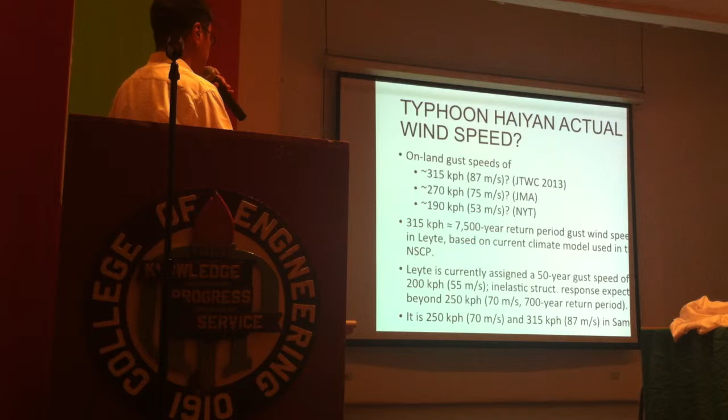Meanwhile, in Samar, the 50-year design gust speed is 250 kilometers per hour, and the 700-year return period gust speed, where damage will start to occur, is 315 kilometers per hour, so close to that number. So one of the things we did was look for simple structures where, based on an estimate of their strength, we can back calculate the wind speed experienced at the site.

So at Lawa-an, Samar, we saw this light post. So tubular steel, around 2-3 meters high. It was bent. Actually, we're not sure if it was because of flying debris or because of the wind. Here you can see it is bent towards the right, and meanwhile the sea is somewhere there, so it's suggesting winds coming from inland. So actually northerly winds must have affected it.

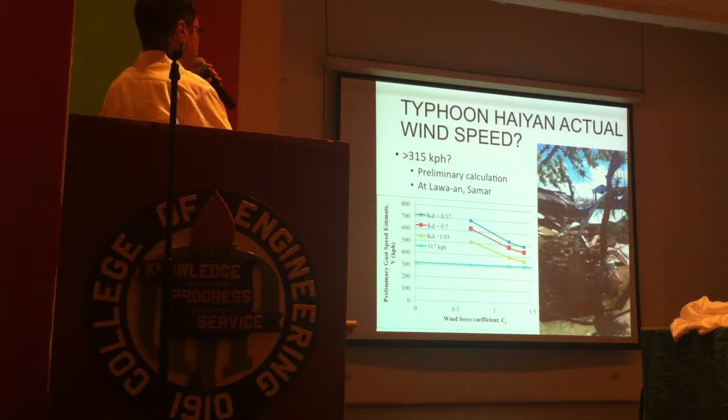Just based on what we know, for a cylindrical shape, the wind force coefficient might be as high as maybe 1.4. And then it depends on the surrounding terrain. You can assume suburban terrain, which is the case here. But to get somewhere close to 315 kilometers per hour, we have to assume open terrain, which is actually not the case, although for a relatively small structure with damage adjacent to it, a collapsed house, it's an acceptable assumption. But these are all assumptions.

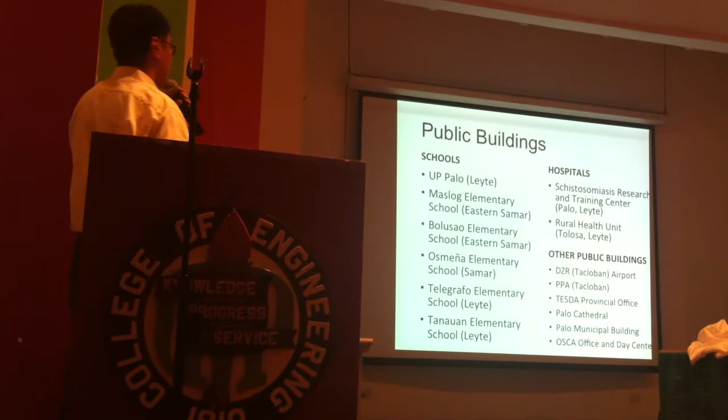But based on our estimated strength of this pole, we can only say the actual wind speed, at least at this location in Samar, might be higher than 315 kilometers per hour gust speed on land. And so to show you some examples of damages, we looked at public buildings, schools.

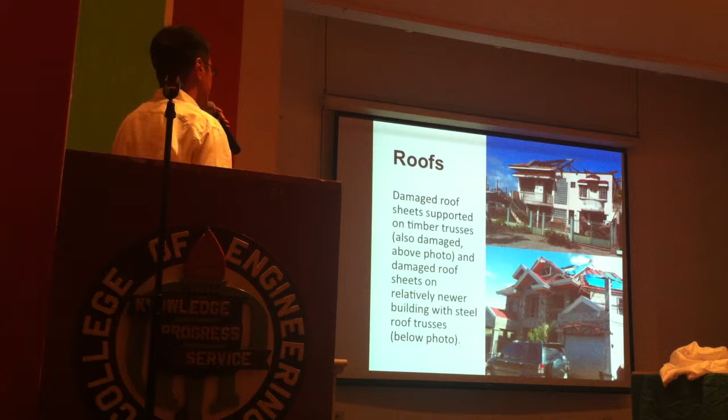Of course, we have plenty of roof damage. Here again, you have a relatively old building with timber trusses. So aside from the roof sheets, the timber trusses themselves are damaged. Here, the steel roof framing is still pretty much intact. The roof sheets are the only ones damaged in the newer building.

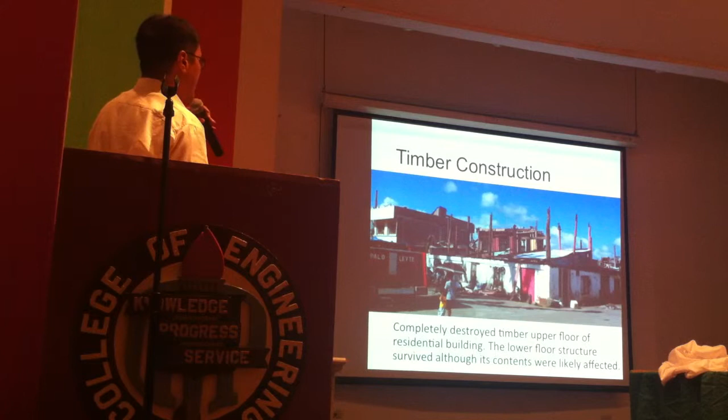And again, just to point out, this is actually Palo, Leyte. The water did not reach this area. It's clearly wind effects that damaged this building. It damaged the second floor. The second floor collapsed on the first floor, so you have, of course, property damage there. Now they just put some temporary roofing on the first floor, so they're still able to live there again.

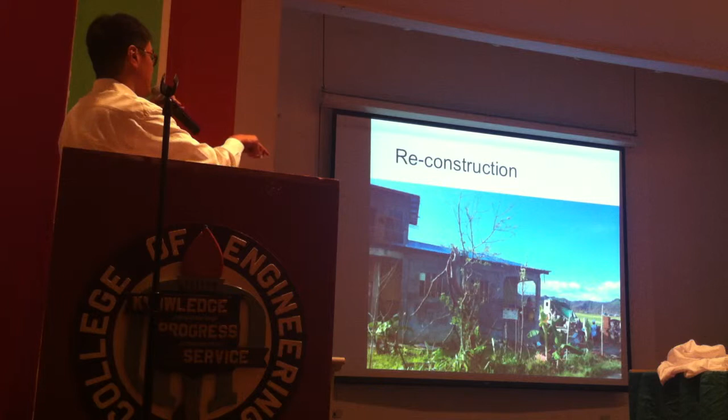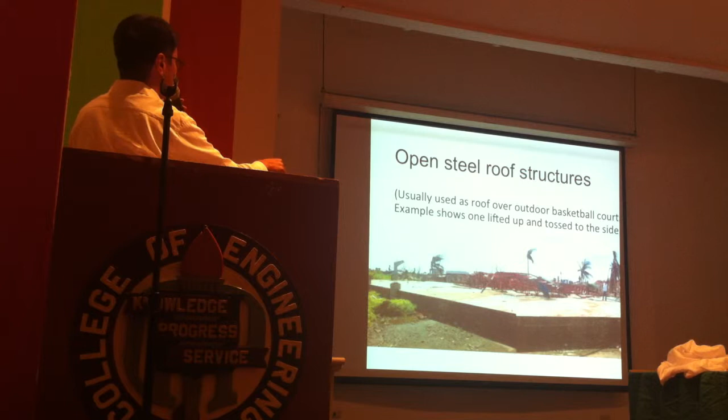And then you can also imagine open steel roof structures. For example, this used to be a basketball court. There used to be a basketball backboard and ring there. That got blown away. But actually, this steel lattice roof structure used to span on top of this open court. But it got lifted up and tossed to the side, basically because the damage occurred at the connection at the base. So in this case, you can see the connection detailing.

Yeah, you have welded angle bars to the main truss, the vertical truss and the base plate and so on. So, well, at least again for, let's say, these very strong winds, it appears insufficient.

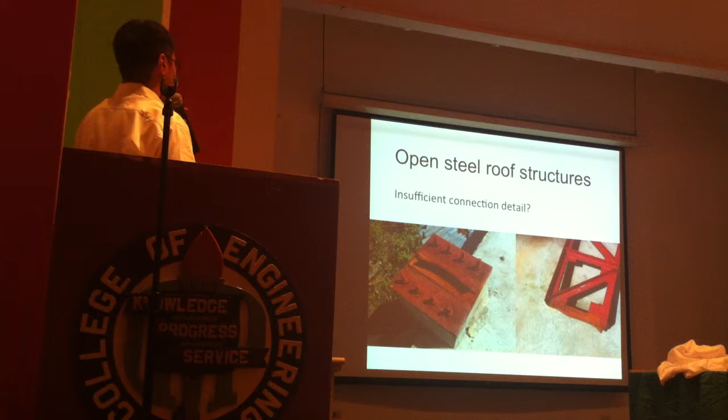And in many cases, this is the connection detail they use. You have, let's say, a concrete structure, a concrete column or pier, and then they just extend the rebar from the concrete column to hook the roof trusses. In this case, this main truss didn't fail, but you can see there used to be a truss line here, which was lifted off from the support.

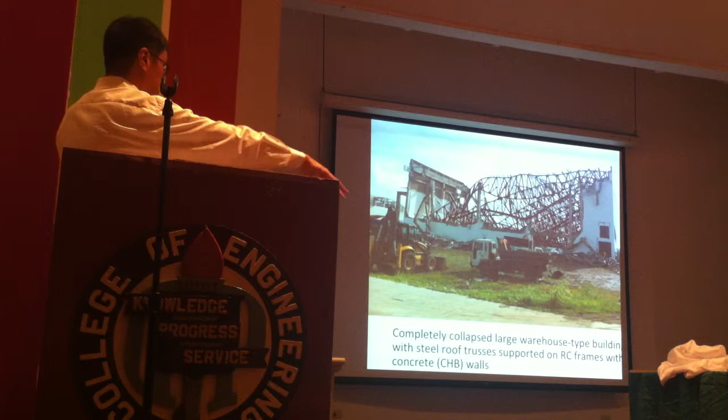And then again, wall-roof systems. So this is one example, an auditorium structure, basically a large open space. This is another example, large open space. You have steel roof frames, and then concrete supporting structures, columns and walls.

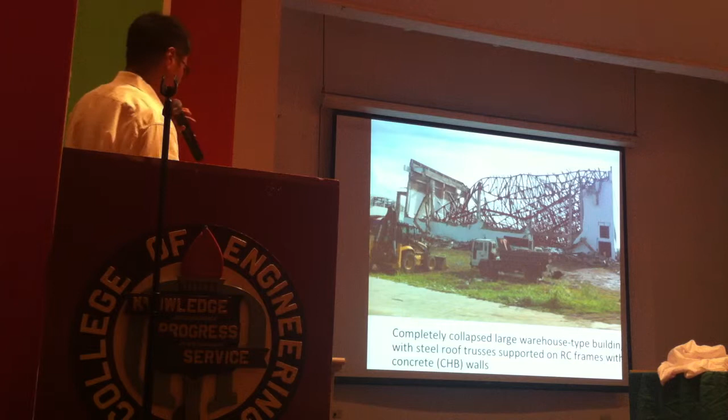So actually this is relatively new construction, maybe not more than 5 years old, but you can see extensive damage to this structure. Obviously the truss might have been lifted off its support, but at the same time, the walls themselves carried a little bit of the forces and the loads, and of course they're not usually designed to do that. Another close-up view of the very large walls. This is around 15 meters to 20 meters tall.

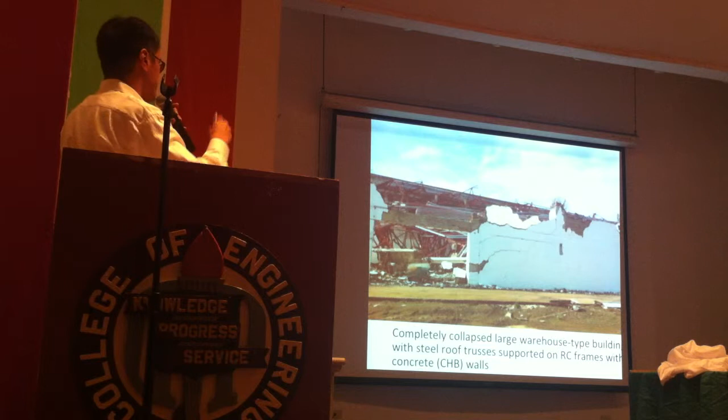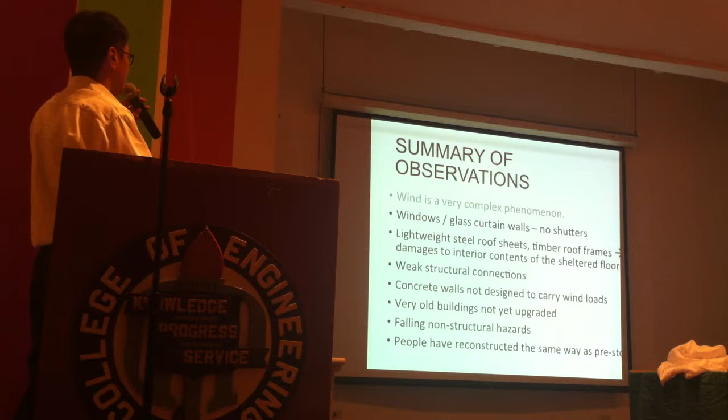So just to summarize, again, wind is a very complex phenomenon. We know that already, but windows or glass curtain walls are not usually protected or designed. There are no shutters, no boarding up. We don't usually do that. Lightweight steel roof sheets are damaged, usually timber roof frames as well. If you have a damaged roof, you will have damaged interior contents of the sheltered floor.

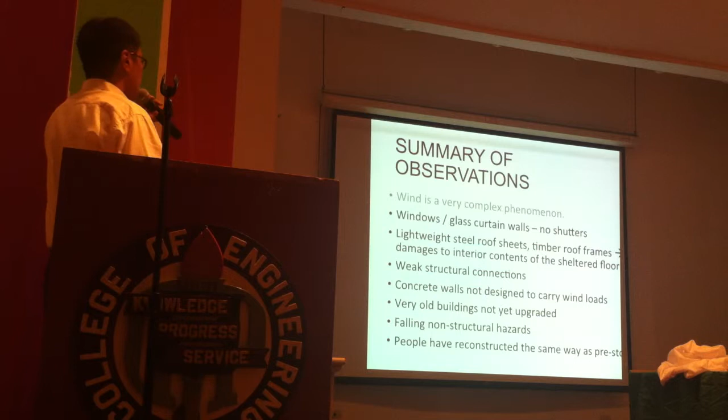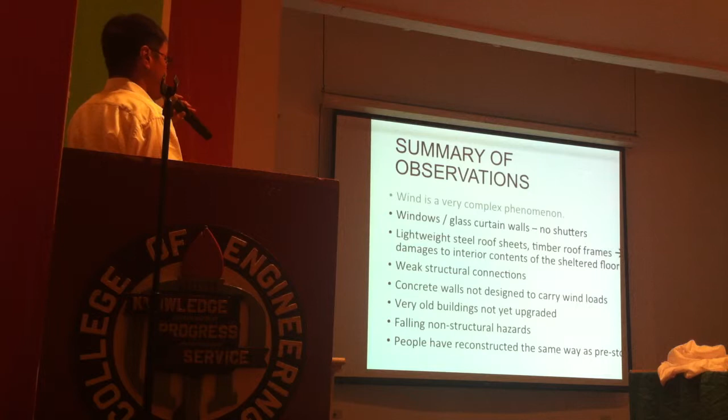Then sometimes it's inadequate structural connections. Sometimes certain elements of the structure that are not typically designed to carry wind loads might need to be considered. And then there are very old buildings that are not yet upgraded. And then of course there's falling non-structural hazards. And we notice that people are reconstructing the same way as before the storm, which might be an issue, maybe not.

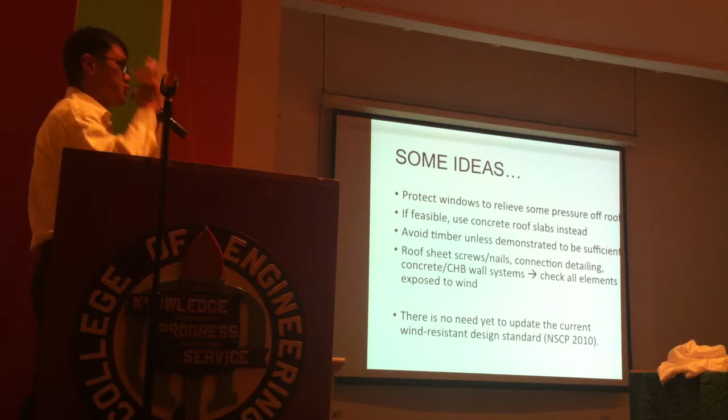We can avoid timber, of course, because they're very light, unless you can demonstrate by testing or analysis it is sufficient. And then basically we need to check all elements exposed to wind. Even in my own experience, for small structures, a 2-story building maybe, I just check the roof for wind, but not all the other parts.

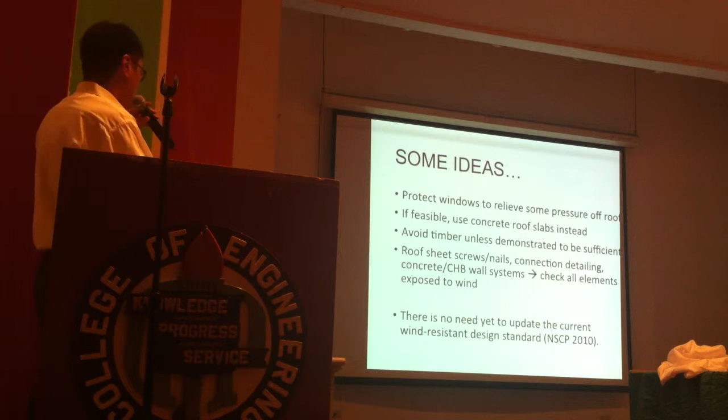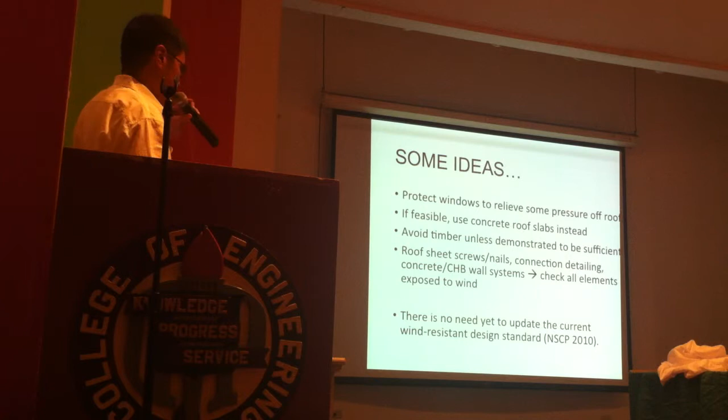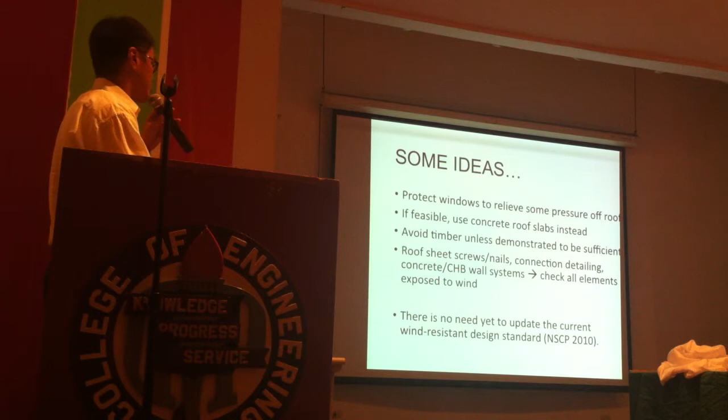And then, because we didn't see any code-compliant structure, we can't say that there's a need to update the current wind resistant design standard, the 2010 National Structural Code of the Philippines. So I think the implementation of our current design standard is one of the first things we can do. So that's all for my presentation. Thank you very much.